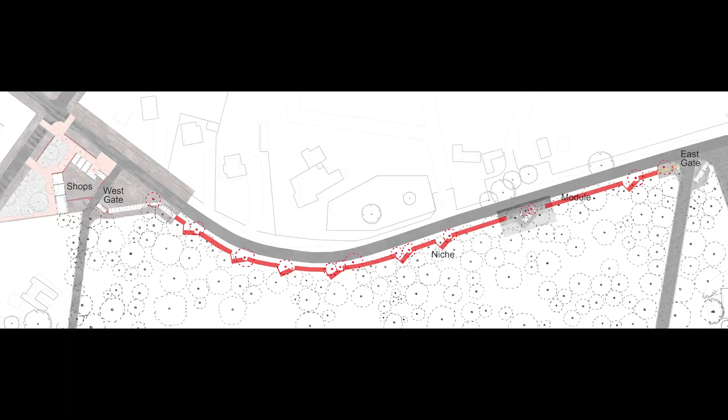However, its edges are reimagined. The roads at the eastern and western edges connect the city north of the unstructured wilderness to the collective spaces of the campus to its south. Redesigning this northern edge, the asymmetrical boundary wall through which the wilderness meets the city, has thus become my focus.

The current sidewalk is used haphazardly by students and drivers as spaces to rest under the shade of the wilderness. It struck me that there exists no urban civic space in the neighborhood solely for an individual, for someone like an office worker or a delivery driver to take a quick break.

The wall was thus approached as a mass with niches within them that accommodate these activities. The city side therefore also assumes the nature of an urban space for an individual, just like the walking path at the other edge of the volume that becomes the boundary wall.

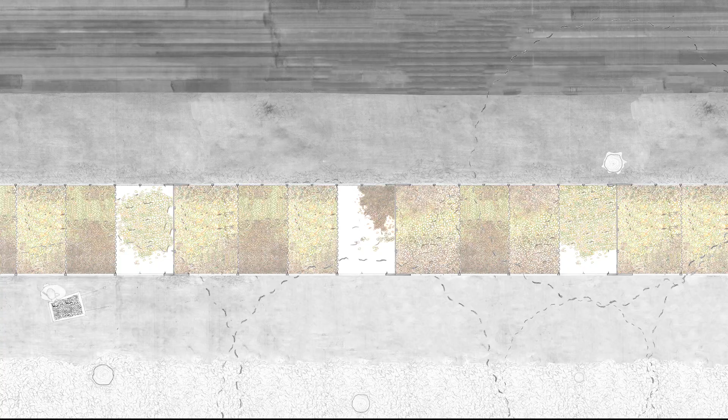The non-programmatic volumes on a university campus are its manicured gardens and lawns. With cities across India rapidly densifying, the universities are usually its only large pockets of structured green. Its maintenance is an ever-present background to the life of a university.

Every day, several truckloads worth of dry, organic detritus are transported from the universities to landfills like the Pirana landfill to be dumped or burned. What if the volume of the wall was an acknowledgement of this process of maintenance?

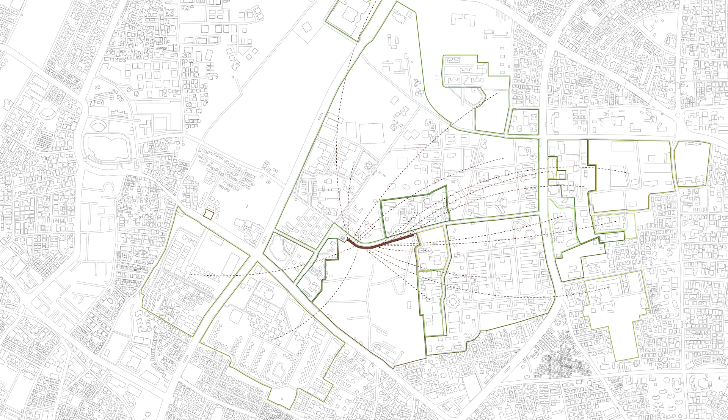Just as the University Consortium Archives is a consortium of the shared history of the university neighborhood, the wall developed into a consortium of the detritus that was swept up in these universities, binding the university neighborhood together through the idea of maintenance. Dry fallen leaves and other detritus collected through the maintenance of the manicured gardens from all the universities are transported by garbage trucks to the edges of the wall.

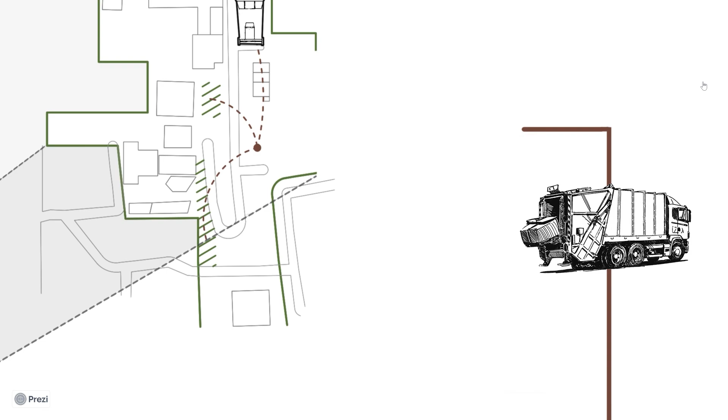The waste is then offloaded into containers that form the wall. The nature of the wall just changes over time as it grows in volume.

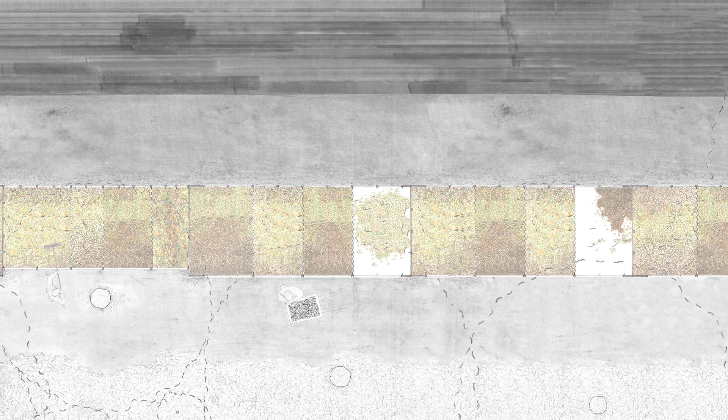The 2.3-meter wide dump truck bed forms a module of the wall with niches utilizing the existing trees in its pathways along the road to provide natural shade to these rest spaces. A total of 9 niches in the 332-meter wall are formed.

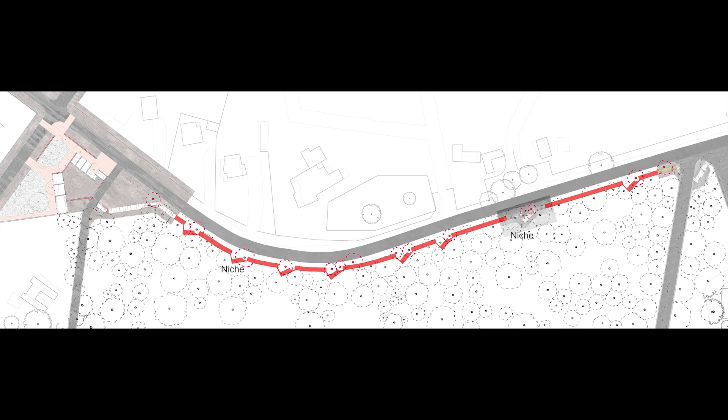The niche, including its materiality, also arises out of the same idea of a consortium of maintenance. Larger branches and trunks that are pruned or fall during monsoons are too big to be dumped into the containers as compost. They are therefore filled into angled gabion walls of the niche.

The container forming the niche holds all the services: a dry toilet, a sink, a drinking water station for any city user to use, and a space for the decentralized storage of equipment for the maintainers of the detritus wall.

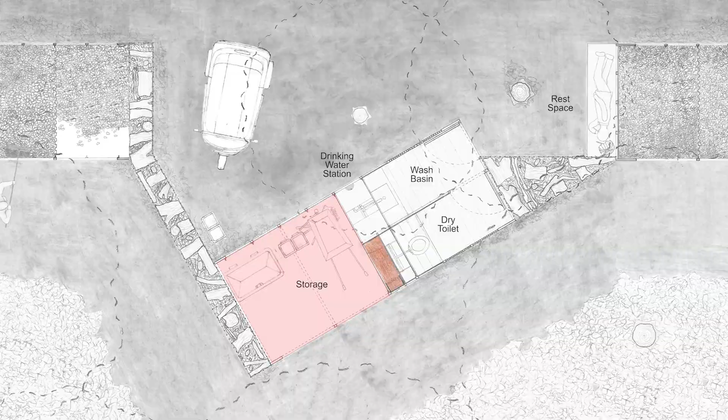The gabion wall allows for ventilation, and the toilet's mechanism is designed to reduce the smell and the need for maintenance as much as possible. The grey water from the sinks in the dry toilets is used to irrigate the manicured gardens of the campus.

The ends of the wall consist of two gates with watchmen's cabins allowing for vehicular and pedestrian access to the campus. The gates are formed by the modules and the gabion walls, with the cabin occupying a redesigned container.

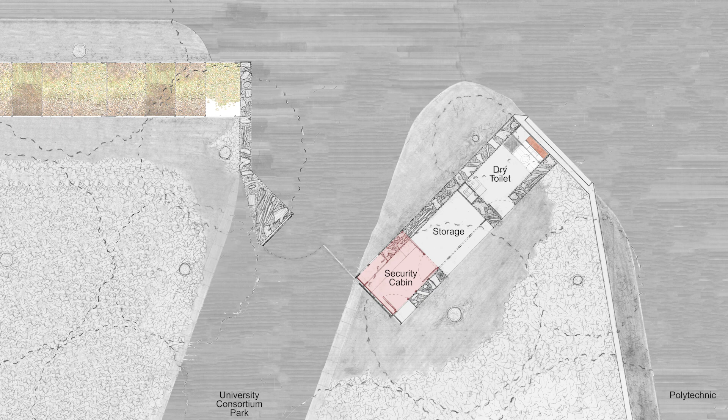On the western edge, the existing Kirana stores and the abandoned Amul store are demolished and redesigned. The shops now accommodate storage and distribution spaces of the humus, along with provision stores arranged in an order that serves both the campus and the city.

This way, the inhabitants of the campus do not need to exit the gate to buy necessary provisions. The overall arrangement also arose out of this theme of acknowledging services.

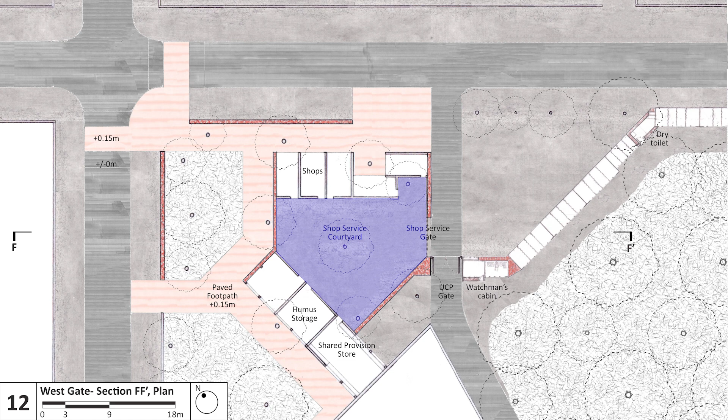The shops are arranged around a service courtyard large enough to account for the turning radius of trucks delivering or loading goods to the back entrances of the shops.

The walls facing the road are broken and replaced by the gabion walls. The sidewalk is pulled inwards, away from the busy crossroad, with the wall enclosing an outdoor space to rest, used by the visitors to the new Amul store to enjoy the wilderness.

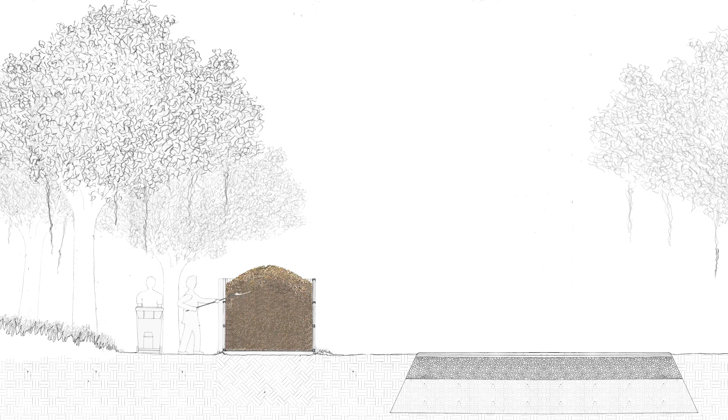After being left to decompose for a few months to a year, occasionally being turned, the humus formed is then shoveled out and wheelbarrowed to the storage spaces at the western edge. It is transported back to the different manicured spaces of the universities to be used as fertilizer.

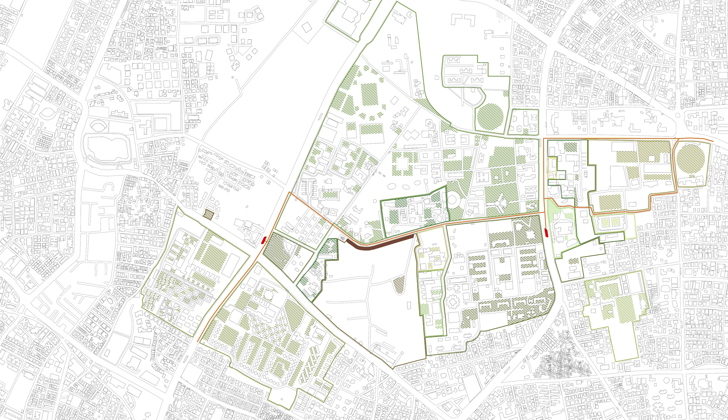The circulation for the maintenance of the wall also forms the walking path of the campus, whereas for the city and the university users, the wall also becomes a promenade, along which students walk through the road that connects the BRTS bus stops and all of the universities of the neighborhood together.